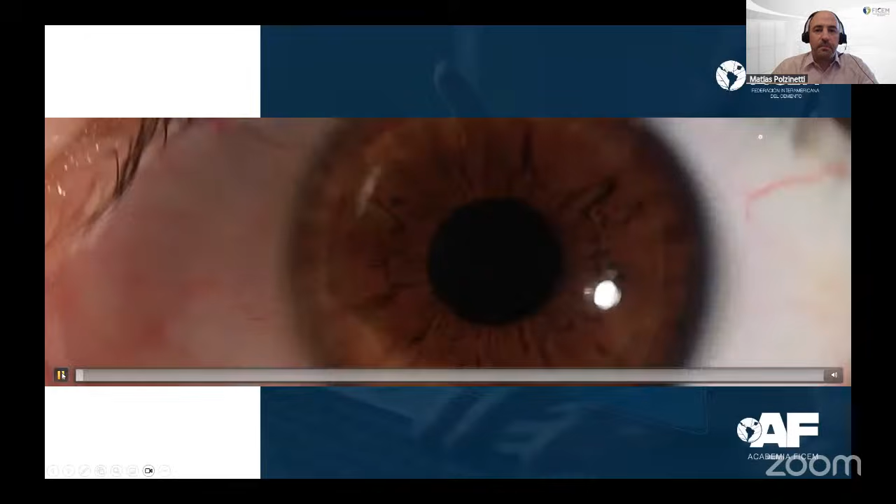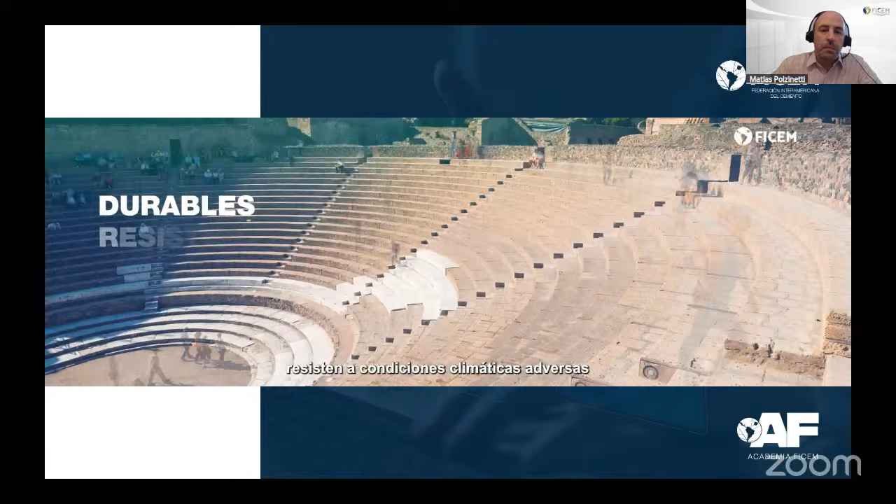Estamos presentes desde hace miles de años. Resolvimos las necesidades de la humanidad y cumplimos sus sueños. El cemento y el concreto son el cimiento que sustenta el progreso y permite construir nuestros anhelos. Soportan el paso del tiempo, resisten condiciones climáticas adversas y nos brindan seguridad. Un material tan único como insustituible, tan disponible como asequible, tan responsable y promotor del desarrollo económico como social.

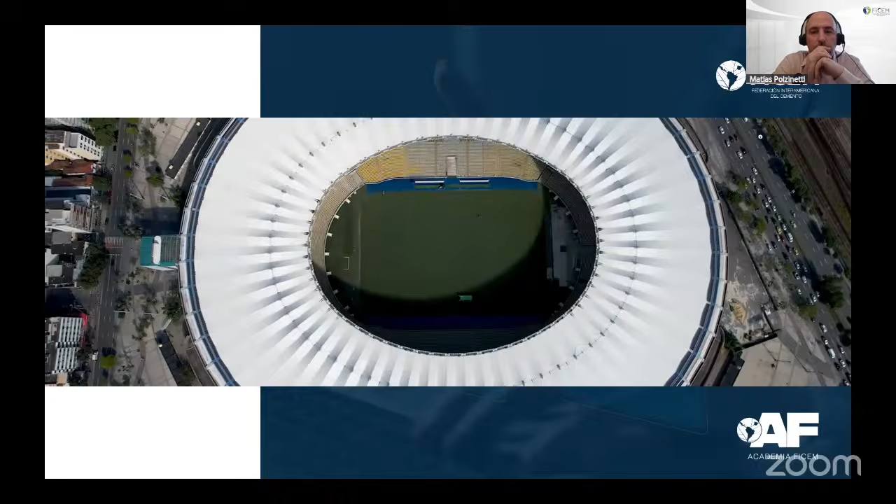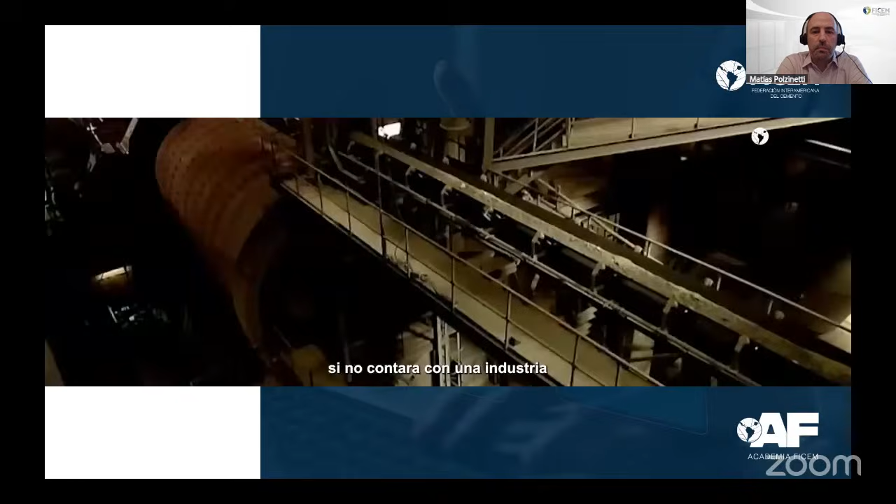Con cemento y concreto podemos construir viviendas dignas, pero, por sobre todo, hogares; puentes y carreteras, conexiones que verdaderamente importan; centros de salud y educación, pero antes que nada, calidad de vida; nuevos horizontes y futuros prósperos, con equidad. Nada de esto sería posible si no contara con una industria visionaria, responsable y comprometida con la sostenibilidad, con la firme decisión de lograr la carbono neutralidad 2050.

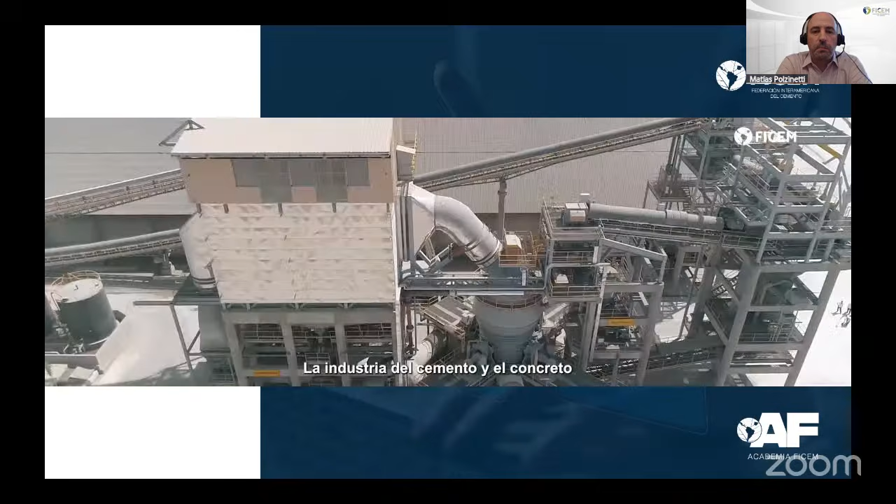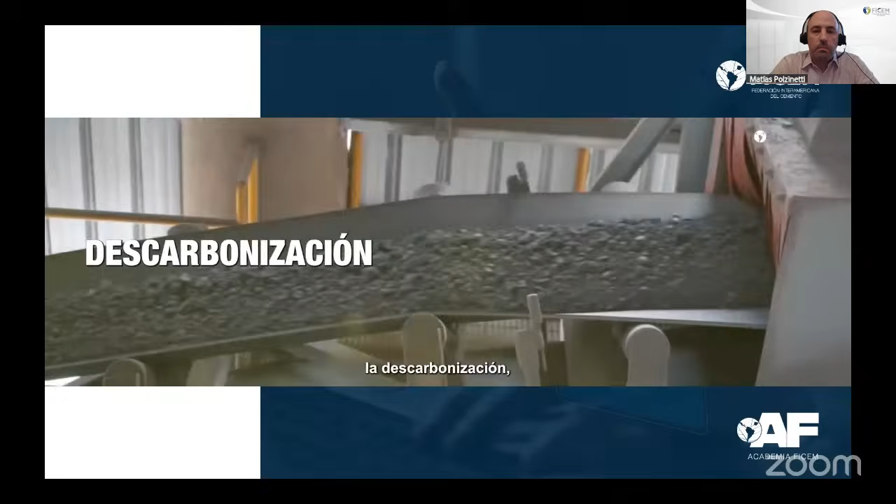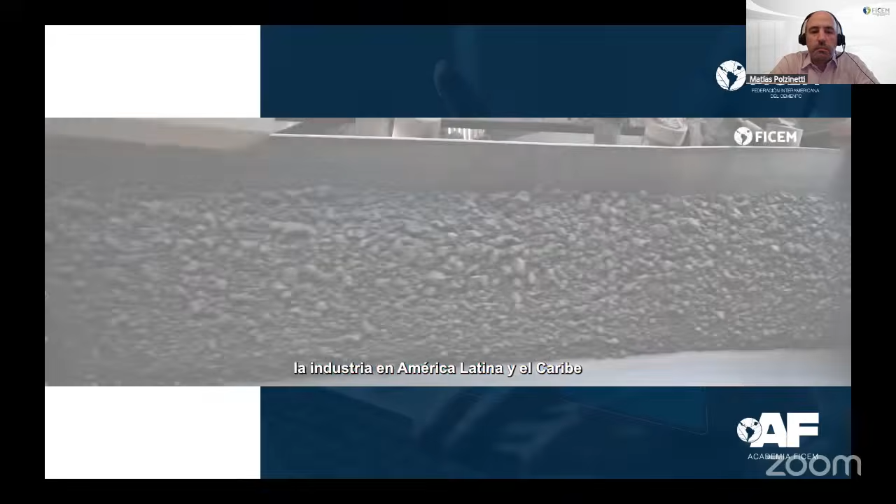La industria del cemento y el concreto es sinónimo de innovación, progreso y tecnología, con una búsqueda permanente de la mejora continua de procesos y productos, enfocados en la circularidad, la descarbonización, la biodiversidad, el bienestar de los trabajadores y las comunidades, y la satisfacción del cliente. Con estos objetivos y bajo el liderazgo de la Federación Interamericana del Cemento, FICEM, la industria en América Latina y el Caribe es consciente de su rumbo: traducir con cada acción la agenda global de sostenibilidad en una estrategia regional y nacional propia, y a la vez posicionar esa visión regional en el escenario mundial.

Somos 26 países, 77 empresas productoras de cemento, 13 asociaciones, cámaras e institutos, más de 20 aliados, y producimos anualmente 200 millones de toneladas de cemento en 270 plantas y moliendas. Por eso somos capaces de construir un futuro sostenible y resiliente para todos. FICEM, potenciando la fuerza de nuestros asociados y representando la industria a nivel global, fortaleciendo el relacionamiento de la industria y difundiendo sus logros. Somos la voz de un sector comprometido con la sostenibilidad. FICEM, la voz de la industria regional. FICEM, una sola voz. Todos somos FICEM.

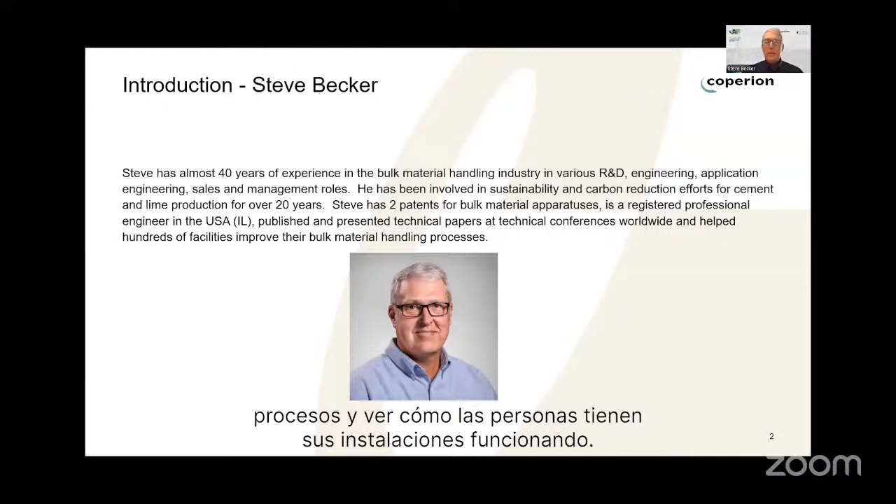I am going to speak to you today about cement blending. I've got almost 40 years of experience in bulk material handling in various R&D, engineering, sales, and management roles, and have done a number of papers and presentations throughout the world on various topics. But probably the best part of my job is visiting plants and facilities around the world and helping to improve their processes and seeing the way people have their facilities operating.

So just a few words about Coperion. Coperion is the world leader in feeding, conveying, size reduction, filtration, and thermal processing. You may have known us previously as Schenck Process FPM in North America. Coperion now incorporates several brands, including Coperion rotary valves and pneumatic conveying equipment, Raymond Mills, which you might be familiar with, Bartlett Snow thermal processing equipment, Stock equipment in the power industry, and of course, some of the former Schenck Process equipment that you might be familiar with.

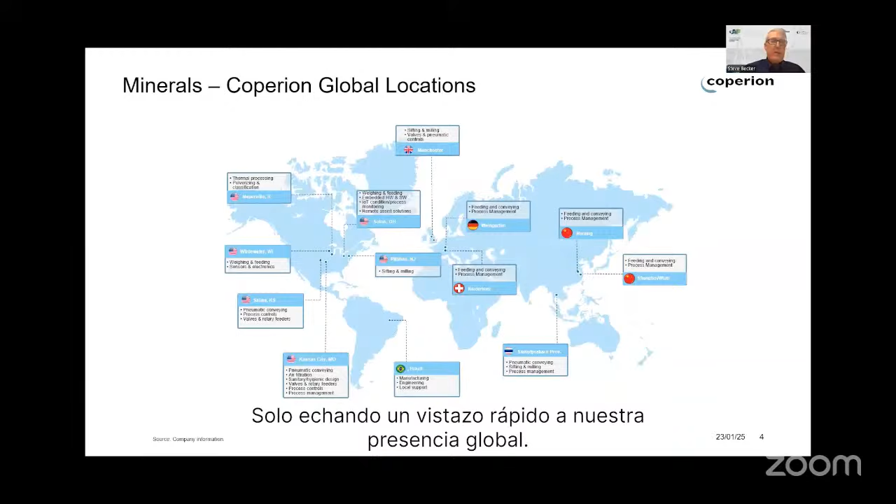Just taking a quick look at our global footprint, you can see we're located all over the globe with facilities to support your needs, both on the pre-sale side, during the sales process, and then after at commissioning and installation and support services as well.

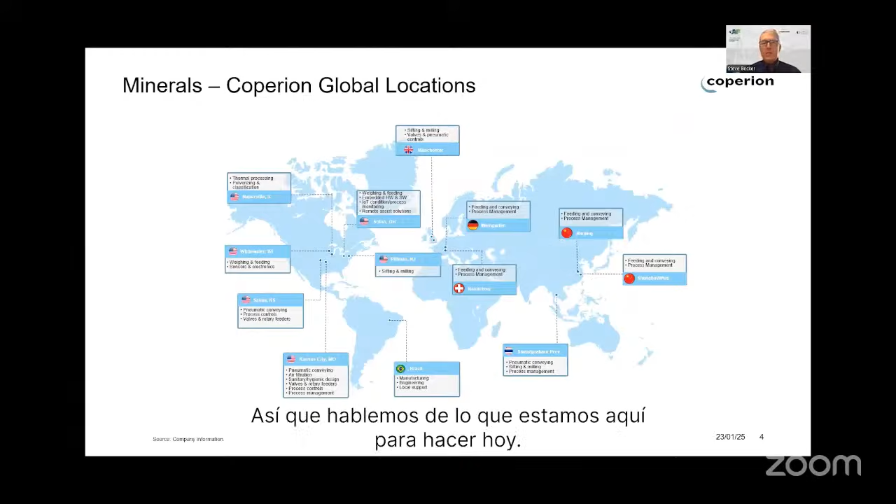So let's talk about what we're here to do today, and that is accurate cement blending. Our goal today is to discuss the importance of accurate blending systems and how to drive efficiency, quality, and sustainability in cement manufacturing, aligning with the evolving industry standards. The backbone of the modern cement blending operation consists of advanced technologies like Coriolis-based measurement, which we'll go into quite a bit of detail, just-in-time blending, and precise feeding and metering. This allows for a very flexible manufacturing process to adjust to the ever-changing SCM availability and concrete blend regulations.

This system works very well with all types of SCMs like fly ash, blast furnace slag, CKD, calcined clay, limestone, pozzolana, and many others. On the picture here, you'll see a typical configuration of what we'll talk about here today, including the silos for the constituents at the top and then the loadout of the blended cement at the bottom. As I mentioned, we're going to talk today about Coriolis-based flow meters and measurements, just-in-time blending and how we blend on demand, and also the importance of precision feeding and metering, and then talk about some of the additional process equipment that's required to pull this whole system together.

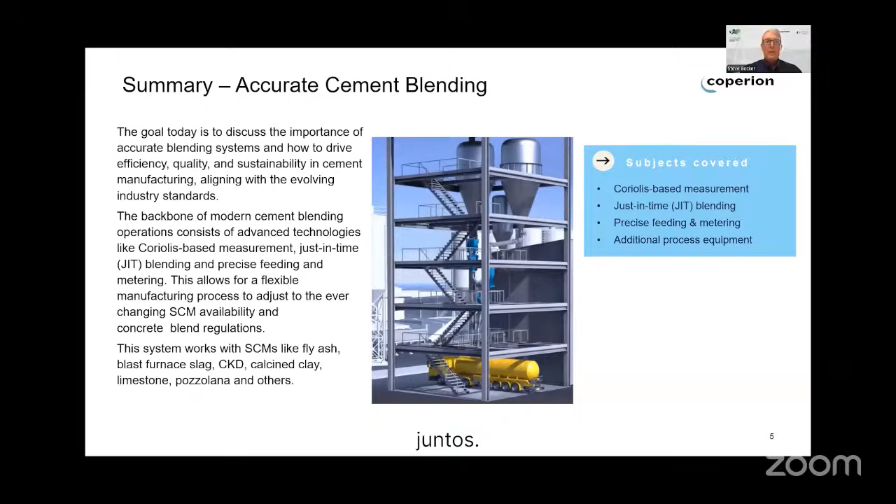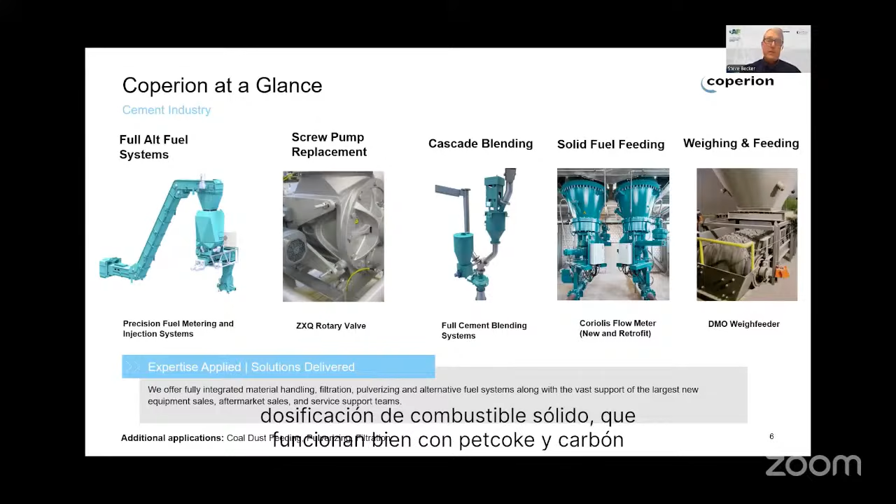As I mentioned before, you may know Coperion from some of the other products that we provide to the cement and lime industry. We've got our alt fuel systems, which can feed biomass and refuse to both the main burner and calciners. We have screw pump replacement valves that can replace screw pumps with a more energy efficient rotary valve. We've got the cascade blending systems, which is what we'll talk about here today, where we're going to blend different constituents into a blended cement. Also using the Coriolis technology as our solid fuel metering systems, which works well with petcoke and pulverized coal. And then also one of our many weighing and feeding pieces of equipment, including our weigh feeders, flow meters, and other feeders that we have to offer.

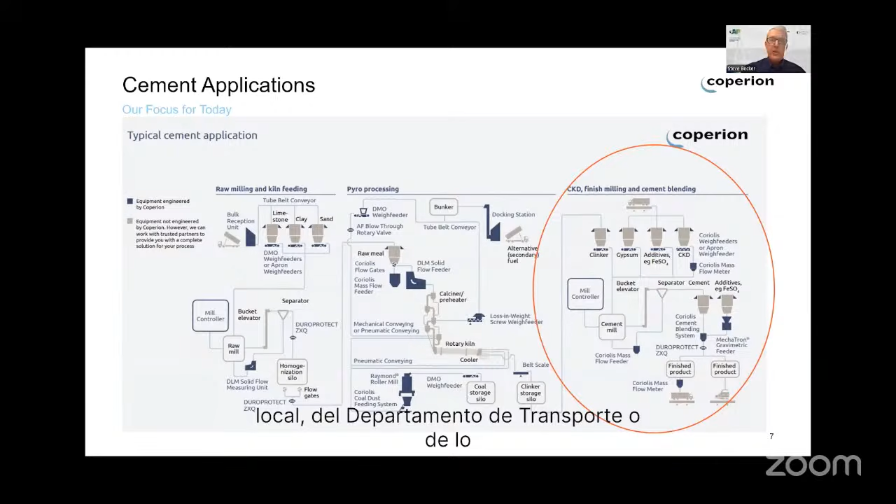So today we're going to talk about blended cement. If you look at this process flow sheet of the cement process, you can see we're going to be talking about everything back here at the tail end of the process. This is where the finished cement is blended with various SCMs right before it's sent to the customer, depending on the requirements of their local regulations, departments of transportation, or whatever the architect or contractor has requested.

So before we get too far into that, I'd like to go through some definitions. Let's talk about feeder and meter. A lot of times those two terms are used interchangeably, but there are some differences I'd like to talk about, and it's important to understand how the system operates to know this.

First, let's talk about a feeder. A feeder is really any device - it could have a screw, a belt, or even a vibratory tray - that accepts a set point that you would provide as the plant operator for a specific feed rate. That device can control and maintain that feed rate by adjusting the speed of the internal feed mechanism based on feedback from the load cells internal to the machine, measuring that change in mass over time.

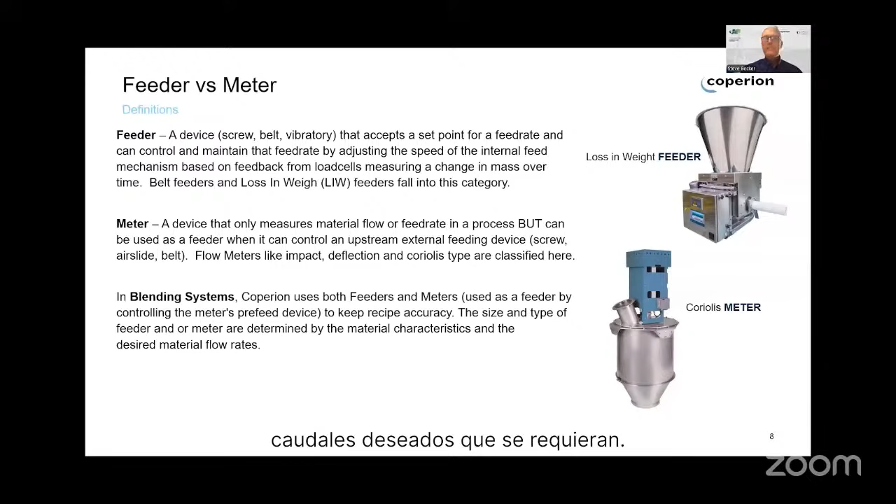This is a very key point we've found in accurate blending: you have to have a very accurate dosing system to dose those constituents. No amount of blending can make up for inaccurately proportioned ingredients. If you were making a cake and by mistake added too much salt to the mix, it doesn't matter how much you stir it, blend it, or mix it, you are not going to alleviate the problem of having a salty cake when you're done. So the importance of adding those components in the proper ratio initially is really the only way to get a good blended system. We start designing our systems with very accurate metering and dosing equipment to ensure we have the best short-term and long-term accuracies.

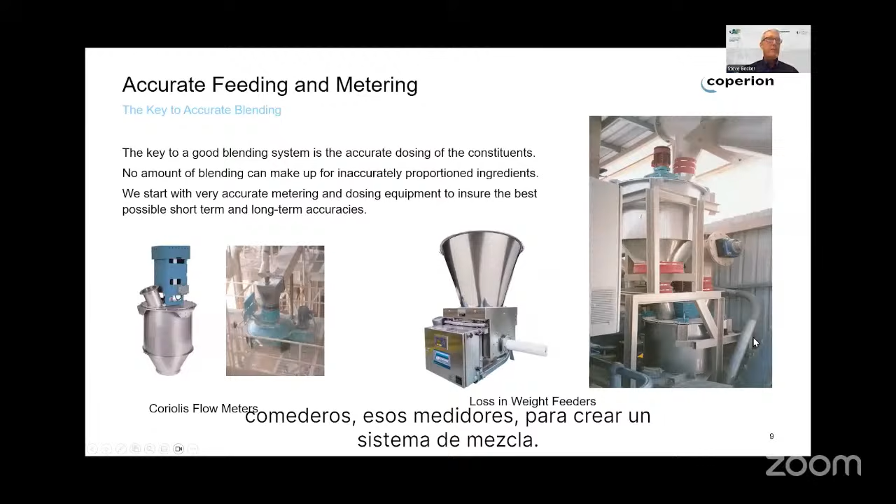I've got some examples here of a couple different flow meter designs. This is a lower rate size flow meter, this is a higher rate size flow meter. You can see the pre-feed device coming in here. And then we will also use some of these loss-in-weight feeders that we talked about earlier. This picture here illustrates how we put those feeders and meters together to create a blending system, and we'll go into that in more detail coming up.

But first, I'd like to talk about what our options are and what choices we have available for feeders and meters. For these low rate additives, approximately 3 tons per hour or less, we can usually use either a loss-in-weight feeder or a small belt feeder.

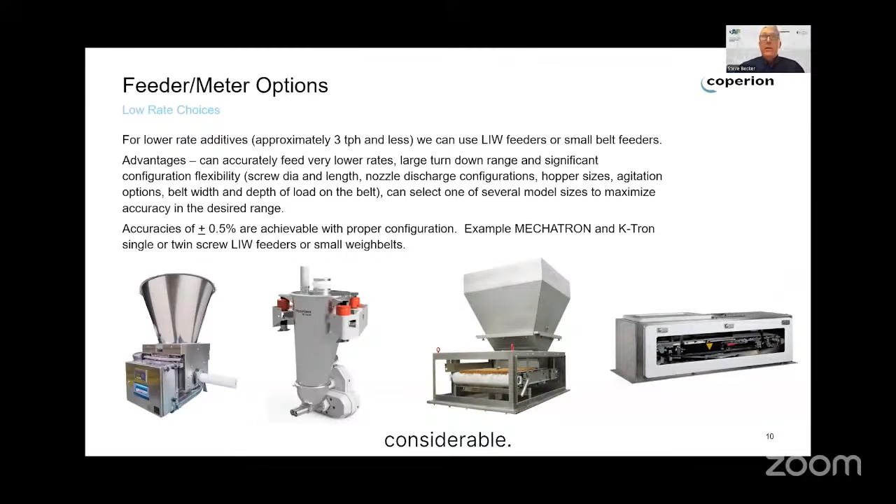The advantages of this equipment are they can feed at very low rates, they have a very large turndown range, and significant configuration flexibility. We can change out screw diameters, lengths, nozzle discharge configurations, hopper sizes, and a wide variety of components. On the belts, we can also change the depth of material on the belt, the width, and the belt speed, and those all can manage the feed rate range. Because we've got that large flexibility, they're very good for feeding low rate materials.

We can also select one of several model sizes that we have available, coming in a couple of different sizes to maximize the min rate and max rate to optimize the range you're looking to feed. The accuracies with these feeders are very good - as I mentioned, usually plus or minus 0.5% accuracy as long as they're properly configured. Some examples are the Mechatron or K-Tron single and twin screw loss-in-weight feeders, or small belts like we've shown here.

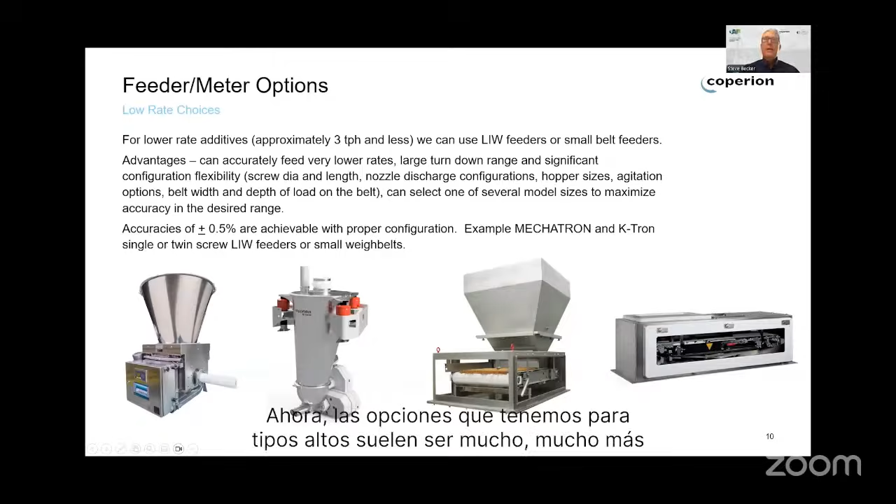Now the options we have for high rates are typically much, much higher, and these are typically for the high rate additives and OPC, which we're blending together. We typically would use a flow meter configured with a pre-feed device to make these a feeder. The advantages here are high accuracy at rates over 2 tons an hour, and even up to volumes as high as 1,200 cubic meters per hour. So very high volumes here.

Again, we have several models to pick from to maximize the accuracy and desired range - a couple different variations so you're not using the equipment on one end of the range or the other. When configured properly, we can minimize wear from abrasive materials, which most of what we're dealing with are typically fairly abrasive. We can adapt them to several pre-feed type devices - air slides, screws, or belt conveyors. We'll talk about those coming up in a later slide.

But if you want a higher accuracy, say plus or minus 0.5%, then we tend to go to the Coriolis flow meter. In most blending applications accuracy, as we said, is very important, so we tend to gravitate to the Coriolis flow meter for most of the weighing in these blending type systems.

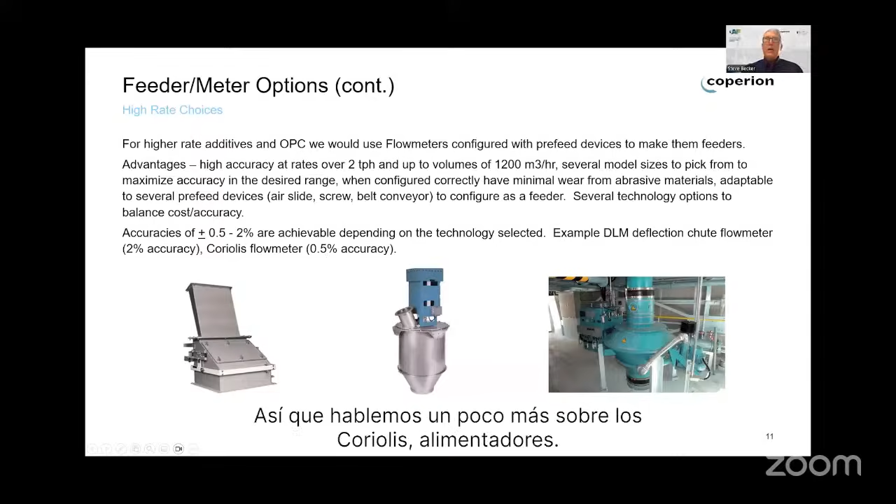So let's talk a little bit more about the Coriolis feeder. As I mentioned, we typically will use them at least for the final weighing mechanism, if not for all the weighing mechanisms for the higher rate materials, measuring the mass flow in the blended cement in real time as it passes through.

This flow meter is really unaffected by factors like material velocity, density variations, or wind, so you're not subjected to a lot of variations in weighing. It's a very reliable piece of equipment, and this technology also enhances accuracy during blending, ensuring optimal proportions and maintaining good product quality with those good accuracies.

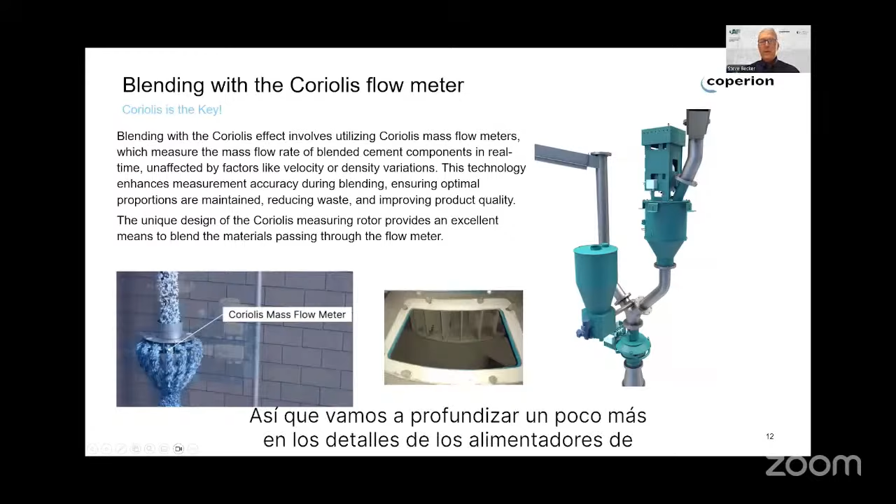So let's look a little bit deeper into the Coriolis feeder details. As I mentioned, the unique design of this meter provides not only very accurate metering, which we'll talk about, but also the added benefit of inline blending.

This technology of Coriolis flow meters has been around for quite a while. It was utilized for many years in the liquids measuring industry, and through the years it's been adapted for use in bulk solid material industries as well. This technology has been in use for bulk solid material handling for over 30 years now, so it's a very well-proven technology.

Material comes in the top of that rotor. There's a small deflection cone in the middle around that shaft. As that rotor rotates at a fixed speed, the material hits that cone, works its way out across the rotor fins, and then out to the outside, discharging at the bottom of the feeder. So if you've got separate streams of material entering the top of this rotor operating at a fairly high speed, you're going to see very good blending and mixing as it runs through the rotor and is mixed back together inside the housing of the multi-core as it exits. That's where the magic happens with the Coriolis meter.

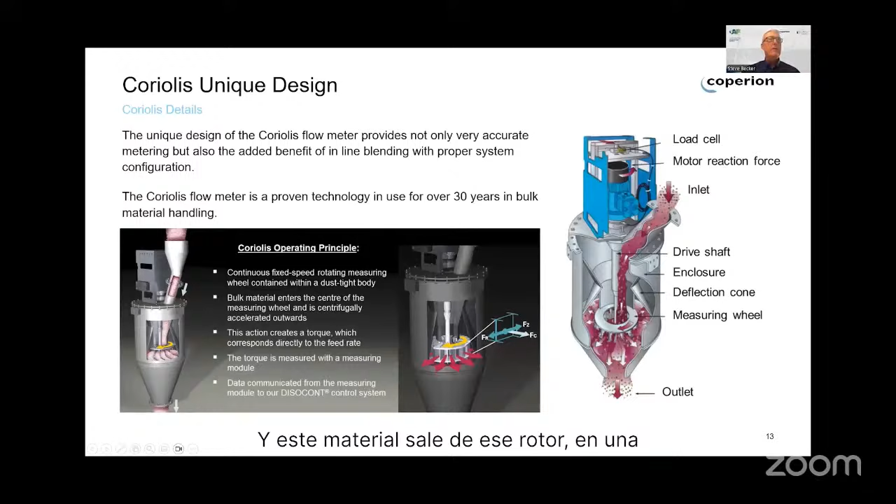Here's another example—you'll see the material coming in the top. It feeds down through this diverter chute into the rotor, and you can see as the rotor is rotating, this material is coming out in a very consistent, well-blended condition. This shows you a little free body diagram of what's happening on the rotor.

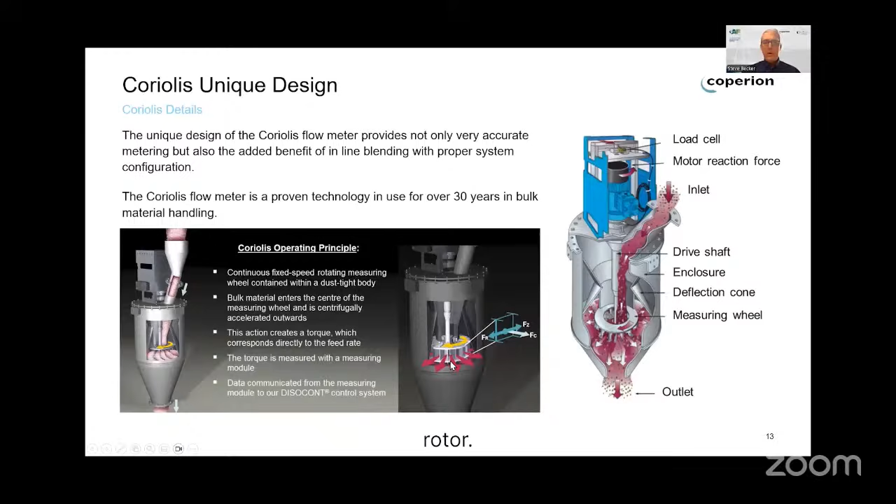Let's take a look at the next slide where we'll go into the math. I won't go too deep, understanding this is a lot to go through, but I'll give you a quick review of the math involved here so you know I'm not just lying to you.

So what we end up with is motor torque divided by a constant, which says the mass flow is directly proportional to the motor torque. That's why these are such accurate machines—there are no other variables that can affect that. And when we measure that motor torque, we can measure it very accurately based on the configuration of the system we have.

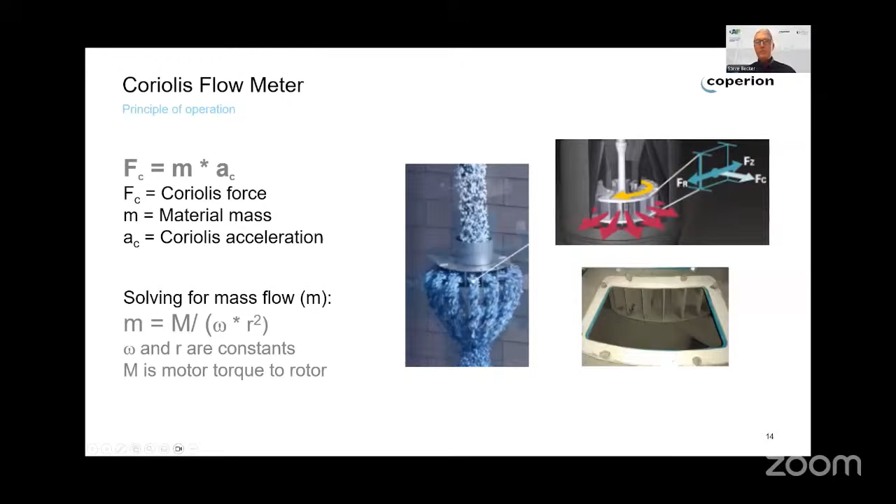Moving on to taking that Coriolis flow meter, now that we understand how that works, we're going to turn it into a feeder. How do we do that? As we mentioned before, we're going to add some type of pre-feed device.

Our control compares that to the set point we've given it, to say I want to feed X tons per hour. It will then adjust our pre-feed device, in this case a valve on an air slide—opening or closing it depending on what adjustment we need. The material flows out from that control device across the air slide down to the flow meter.

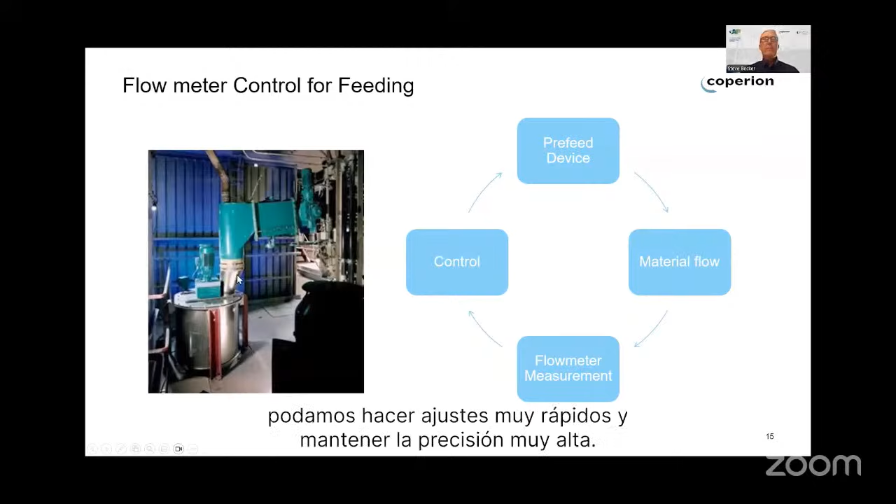And then we measure that again, and we continue this loop over and over until we can maintain very accurate feed rate accuracy. In the time it took me to explain that, the control system probably would have done it 100 or 150 times, or more. This is continually running, a very fast control loop, so we can make fast adjustments and keep the accuracy very high.

Now, looking at some of the flow meter pre-feed devices we'd typically use, let me start with an air slide. This is probably our preferred device for a number of reasons. They're very common in cement plants and lime plants already, used because of their minimal wear, since the material is so fluidizable. It's a very easy way to move material, with very accurate flow control adjustments.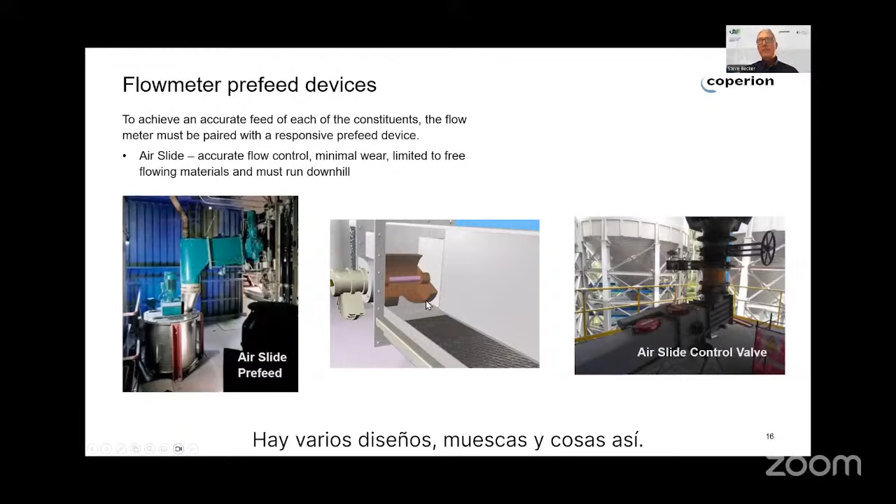So what we've got here is a cutaway showing the actual representation of what that control valve looks like. There are various designs and notches and things. We don't make air slides, we use air slides, but the air slide manufacturers can really help you dial in the best control valve design for the material and situation you have.

And here you can see another example. We've got the bin here, with some manual valves to do maintenance on the control valves. And the air slide—here's our control valve in this situation—and our air slide going down, feeding our flow meter.

So this is an arrangement, as I said, we prefer. There is, for a number of reasons, minimal wear is obviously one. It is limited to free-flowing materials. Most of the materials that we're talking about, most of the SCMs and the OPC we deal with are free-flowing, so that's usually not too much of an issue.

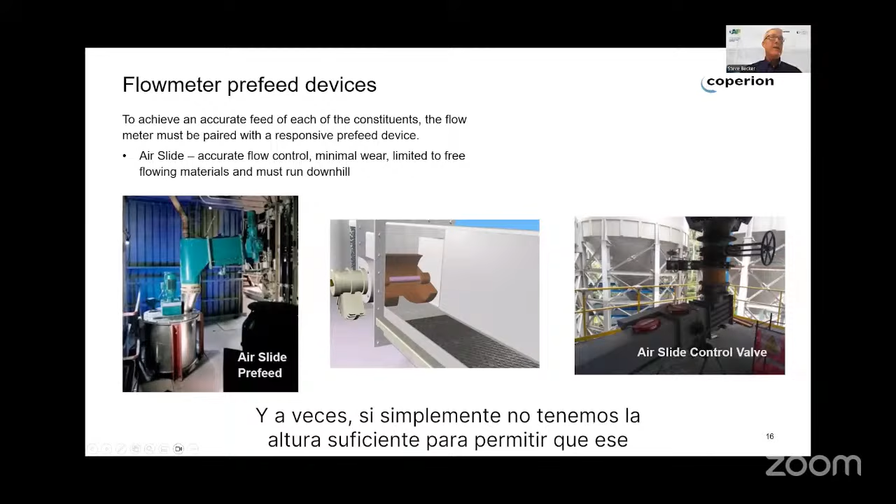But they must run downhill. They rely on gravity to get the material to move. So if you've got a fairly long run from the bin or hopper to where the flow meter is located, it could be a little problematic because you do need some height to make that adjustment. And sometimes we just don't have the height to allow that material to flow downhill.

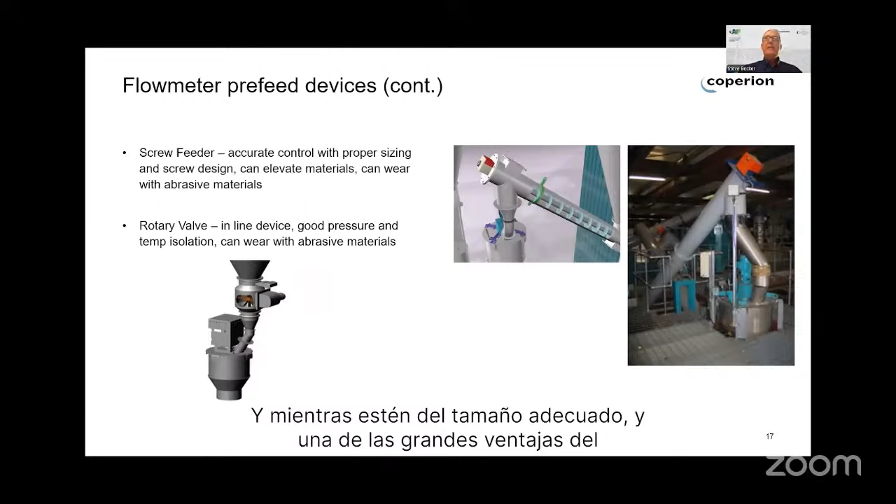Some of the other pre-feed devices which we will use include screw feeders. Screw feeders are another very good way to accurately control, as long as they're properly sized. And one of the big advantages with the screw feeder is you can actually elevate materials. Whereas with the air slide, we have to make sure that we're downhill from where the material enters the air slide, with a screw conveyor, we can configure it to actually raise material up.

And you'll see in this picture over here on the right, we're doing that. We've got the flow meter here sitting through the floor. We had some process piece over here, which we had to get the material over to the flow meter. So we've put in this feed screw that brings the material up and gets it to the flow meter.

Now there is some requirements for screw feeders that we do want to maintain. There's a minimum RPM that works best because we don't want pulsations going to the flow meter, because that control loop's going to see material and then no material and material and no material, makes it hard for it to control. So by increasing the speed of this screw, we can make sure that we don't have those pulsations and the accuracy is maintained.

And then one of the other devices that we will use is a rotary valve. You're probably very familiar with rotary valves as well. A very good device we use in line with the flow meter. Has excellent pressure and temperature isolation. So if you've got a high pressure or high temperature situation above the flow meter, we would definitely want to isolate the flow meter from that.

So rotary valves are very good. But much like a screw conveyor, we can have abrasion and wear situations because a lot of the materials we have are very abrasive. So we can have wear on rotors, bearings, seals, all the things like that.

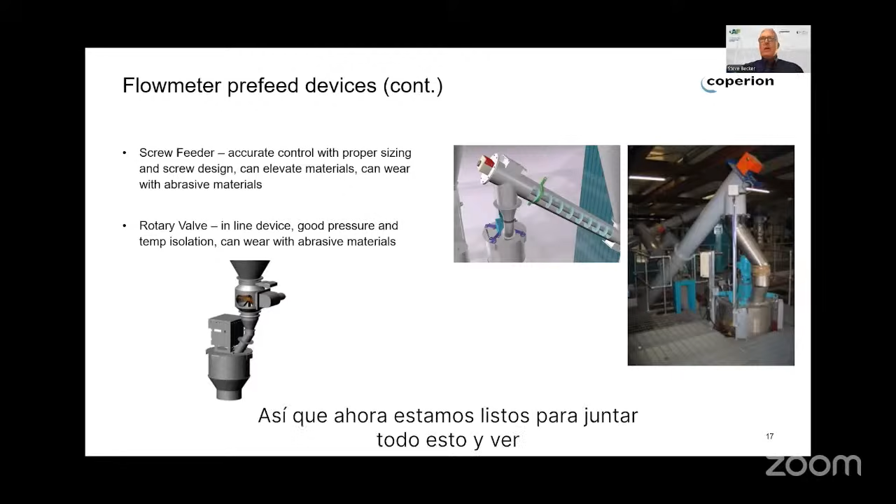So now we're kind of ready to put all these together and take a look at how do we configure all these pieces of equipment to give us a blending system. So let me start by going through that.

We've got very accurate feeders now. We've got flow meters with pre-feed devices. We've got a very fast-acting control loop, but we somehow need to get blended cement out of this. So here's how we configure it to do that.

So let's start up here with this picture with these two bins or silos. We'll call it material A and material B. And we'll work our way through this process and this configuration.

So material A, we're going to extract out of this bin. Through here, we show an air slide and a control valve. We're going to extract that down out of that bin. It's going to go run downhill, and we're going to feed this flow meter here. We'll call that material A's flow meter.

So material A's flow meter is going to get a set point from the recipe that we have established. And we're going to control this control valve to hit that set point. So we're running that control valve or that control loop right here in this situation, maintaining a very accurate set point feed rate that we have run to this device here.

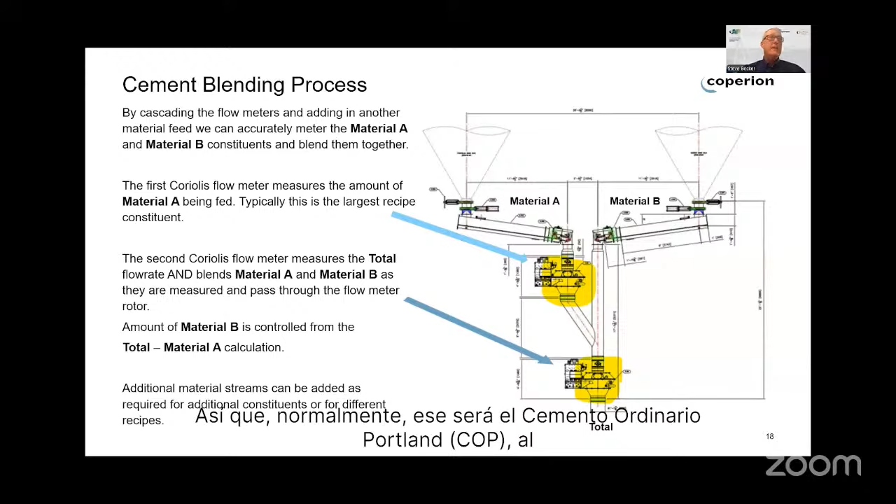Typically, we'll do this for the largest recipe of whatever that recipe calls for, the largest constituent. So typically that'll be the OPC that we're going to blend the other additives to. So once we have that material A running through its flow meter and we're feeding at the proper rate, it's going to flow down and flow into this second flow meter, which we're going to call the final flow meter.

So that final Coriolis flow meter is measuring not only the material that's coming down that we're measuring from material A, but we're also going to extract material out of this bin over here, bin B, through another air slide and control valve, and that's going to drop directly right into this flow meter. So no other flow meter or weighing device on this leg. We're just going to drop it down directly into that final flow meter.

Since we know the total that we're producing here, and we know how much of material A we're putting into the final flow meter, we can calculate that the total minus A gives us how much material B is. The control will actually look at that ratio to make sure that we are having the correct amount of material B in this total blend. If we don't have that correct ratio, this control loop on this flow meter will start adjusting this control valve here, and we will increase or decrease the amount of material B flowing into this arrangement so that we get the correct ratio of material A to material B as it comes out here.

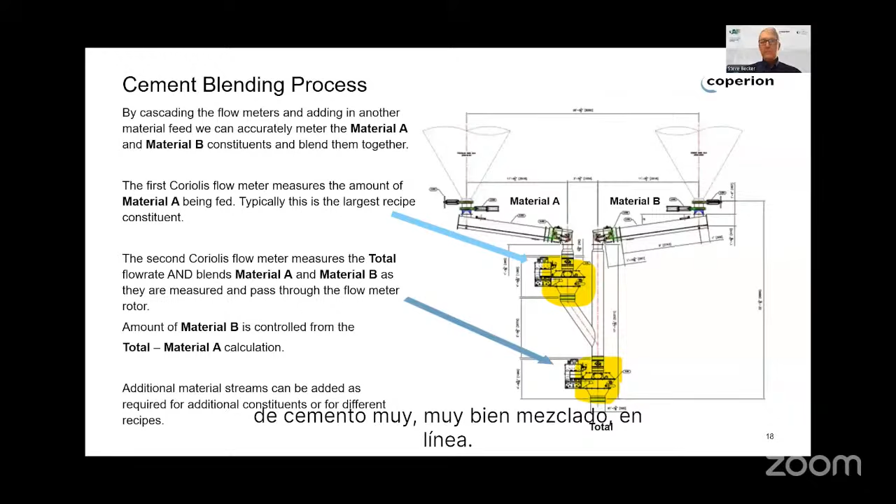So you won't have to run a 15% fly ash material. You won't have to run, say, 500 tons and put it into a silo. You can just run that as needed and run it right into a truck or a rail car as you need it. And then as the next truck or rail car comes in, we can switch that to a 10% fly ash blend almost immediately.

Some plants will blend the cement in the mill, so they'll run that back through the finish mill and add the SCM into the finish mill and run that through. That does work, and that's a good way to do it. However, you do take up some mill capacity by doing that. So if your finish mill is already running near capacity, you don't want to lose that capacity.

And so by putting this blending system downstream of the mill, you can run your mill at capacity and not have to worry about changing the grinding or the classifier or any of the equipment in the mill circuit as the fly ash goes in, or limestone or whatever. You can optimize that mill for grinding clinker, since it will only grind clinker.

We also eliminate the need for a secondary mixer, blender, or pug mill. This reduces a considerable amount of space, might even reduce an entire floor in a blending tower, and it reduces capital and operating costs. A lot of times these mixers and pug mills have very large electrical motors with a very large electrical draw, and by eliminating that piece of equipment, you've eliminated that electrical requirement and saved some operating costs as well.

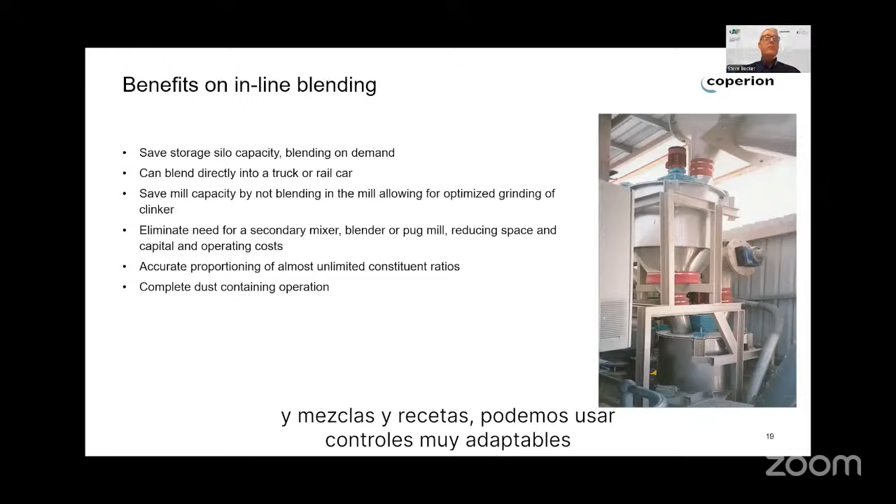We're accurately proportioning those additives in there, and as I mentioned, we have an almost unlimited number of ratios, blends, and recipes we can use. The control is very adaptable to take a number of different recipes and hold them in, accurately measuring and metering to those recipes when called for.

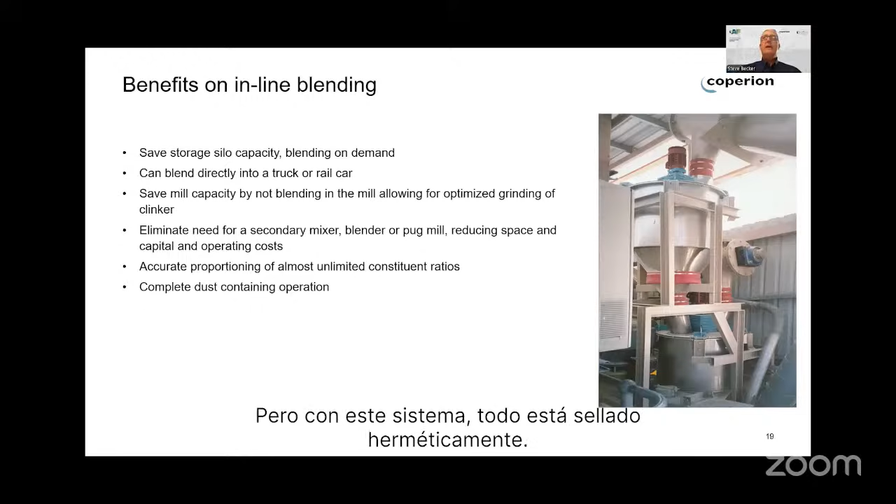As I mentioned previously, the entire system is completely dust contained. Sometimes these pug mills and blenders need to be accessed, so they don't always seal the best. But with this system, everything is sealed up tightly. We do have some flex connectors you see in this picture here, but those are very robust and don't typically see a lot of wear, so they last a very long time before you need to replace them.

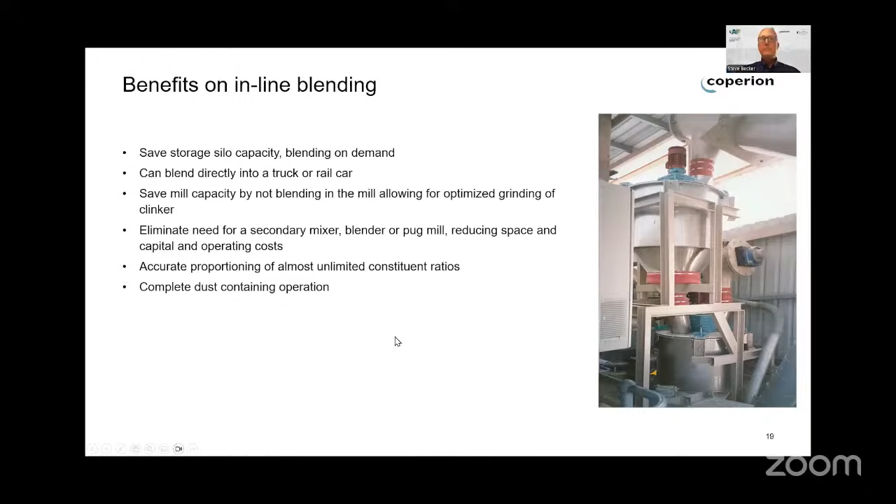So let's look at some of the other equipment that we would typically use in a blending system. Let's talk first a little bit about pneumatic conveying, or how you connect the dots. We've got these process pieces now, but we need to connect them up between different process steps. One of those is pneumatic conveying.

We would use this a lot when unloading a truck or a rail car with the SCMs. If the truck or rail car comes into the plant carrying your fly ash or ground blast furnace slag, you somehow need to unload that and get it up into the silo, which typically can be very high. So we typically use pneumatic conveying to do that, particularly if the truck comes in as a bulk truck.

So we can do both lean or dense phase conveying. I won't go into the details in this lecture, but that has to do with material to air ratios, and both have their own place depending on the material characteristics, the convey distances, the desired transport rates, and what's the most economical in capital and operating costs.

This picture here you'll see is a dense phase pump. This is very common for large feed rates of very abrasive material. They run at very low velocities, so the wear on the pipe and components is relatively low.

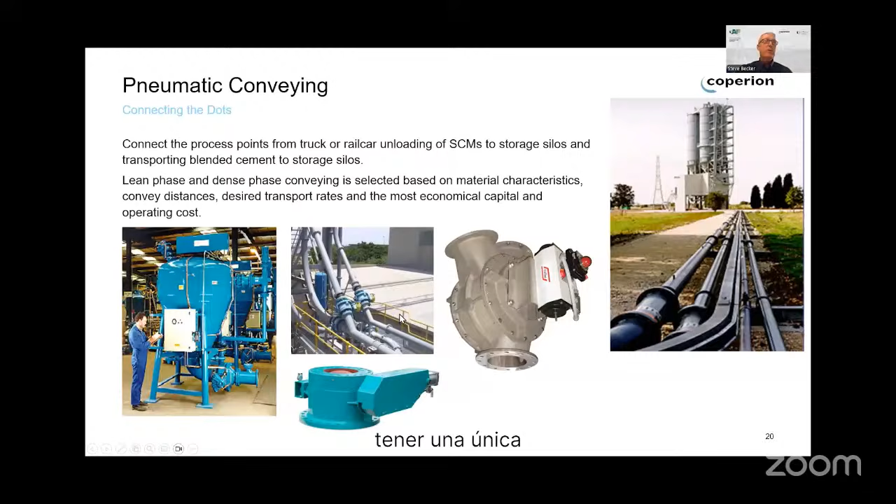This picture here shows a diverter valve, and you see a close-up of that diverter valve here. If you have a truck unload or a train unload station, we can have one single connection to that truck, and then have diverter valves along the pipeline to dump it into various silos. So if the truck you have now is fly ash and the next truck coming is blast furnace slag, you can divert that next truck into a different silo using pneumatic conveying diverter valves.

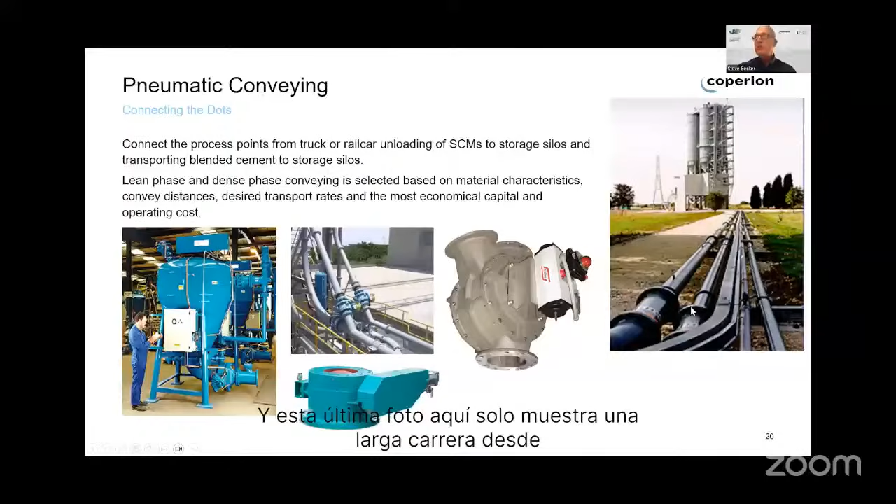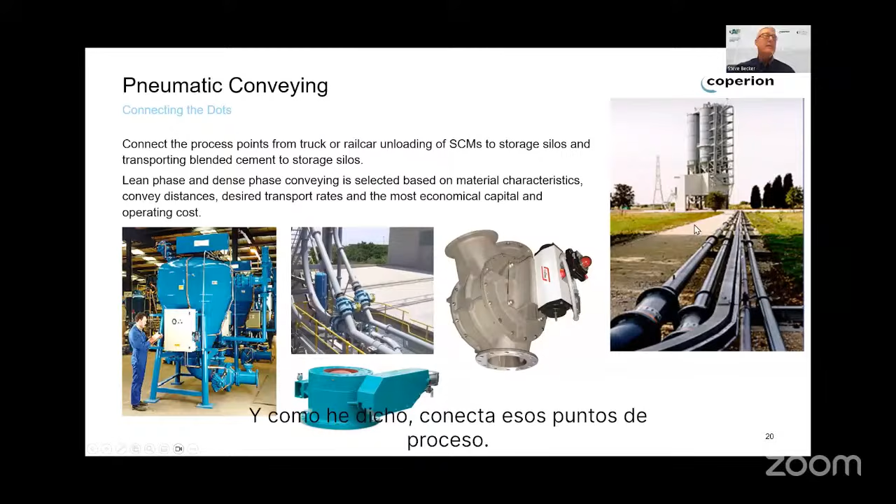This we call a sphere type valve, used for very abrasive materials, typically on the top and bottom of these pressure pots as well. So we have various uses for those. This last picture here just shows a long run from a process point out into a load out facility with a silo. Very flexible, very adaptable, and as I said, it connects those process points.

Next, I'd like to talk about filtration. Environmental regulations and employee health and safety are very important in plants today. Air filtration really helps with both of those and is an important part of any process we put into a plant. Air filtration is very common in silo venting, transport air venting, air slide venting, transfer points, and process filters.

All these need to be designed to specific requirements and make sure they meet your local regulations and plant permits. They should be selected with the correct media for the application, material, and airflows. We have several technologies available, from traditional pulse jets to very energy efficient medium pressure units, which use their own internal blower rather than compressed air. So again, some opportunities for energy savings there.

I would recommend you look at suppliers who have years of SCM filtering experience, because they are pretty difficult to handle and filter at times. You want to make sure you get the correct sizing and filter media selected the first time, rather than having to go back and resize things later.

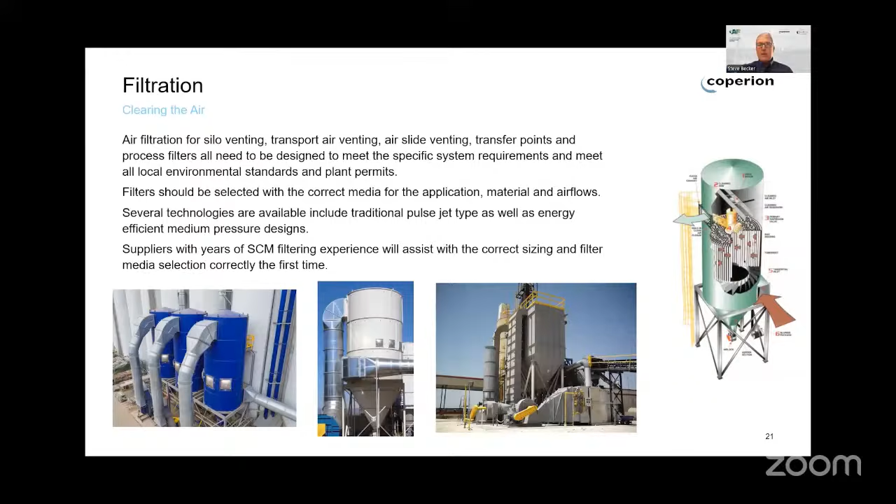So next, we've got this blending system concept that we just went through using the Coriolis flow meters. It still might be a little difficult to grasp, because there's a lot going on, a lot of parts moving around, and a lot of configurations we have together.

So I'd like to offer this animation that demonstrates how the equipment's used and some of the technology we discussed today. Let me play that now, and it'll tie together all of what we talked about here today. This video is on YouTube, so all you have to do is look up Coperion cement blending, and it's available right on YouTube if you want to take a look at it later. So I'll be quiet, and let's watch the video.

So next, what I'd like to talk about, since we've got all these formulas explained, and all these pictures and animations that are really cool, right? But does this really work? That's the real question. So what I've got here to offer for you is a real life example that we can discuss.

This particular application is at Argos Rio Claro in Colombia. They are blending a calcined clay with OPC. This blending plant has been in operation since 2018, and it mixes multiple ratios of clay up to about 30%, so some pretty high ratios.

They have reported consistently achieving coefficients of variation of less than 10. If you don't know what coefficient of variation is, that's a statistical measurement of distribution in a population. It tells you how much variation you've got from sample to sample. The blending and mixing people will tell you that any coefficient of variation less than 10 is typically a homogeneous situation. So the results Argos has been getting have been very, very good, very consistent, and very homogeneous in their operation thus far.

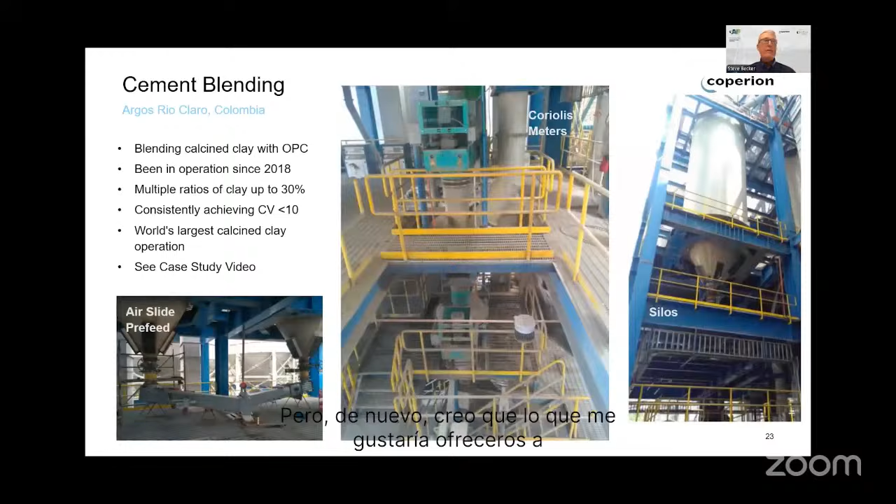But again, I think what I'd like to offer you next is a kind of case study that we did with the people at Argos, which we appreciate their help with. Let me play that next.

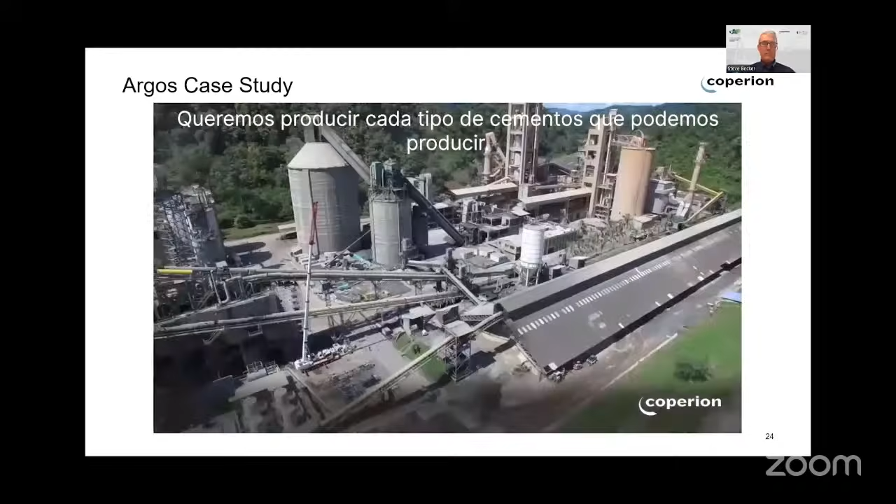I believe that blended cements are going to be the future of cements. This is a 1,500 ton per day kiln, the biggest and newest calcined clay kiln in the world. We want to produce every type of cement that we can produce, not just a very specific type 1 or type 2. We're going with whatever cement the market is requiring. That also required the system to be adaptable.

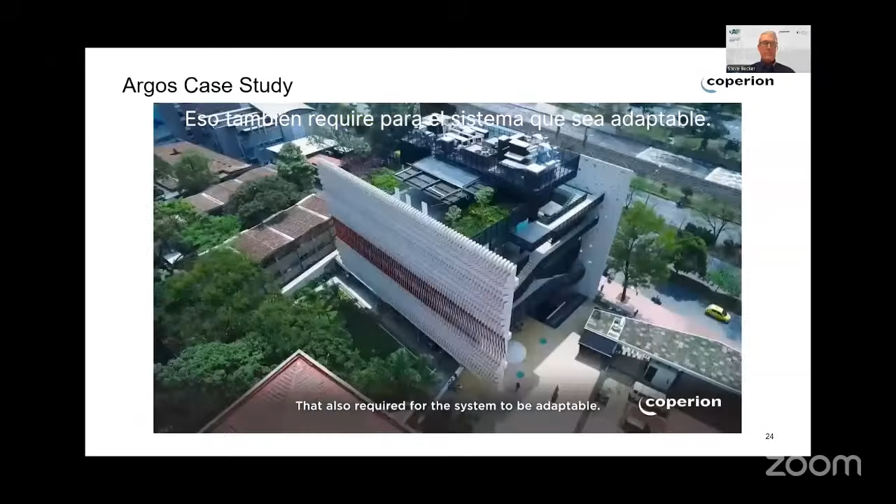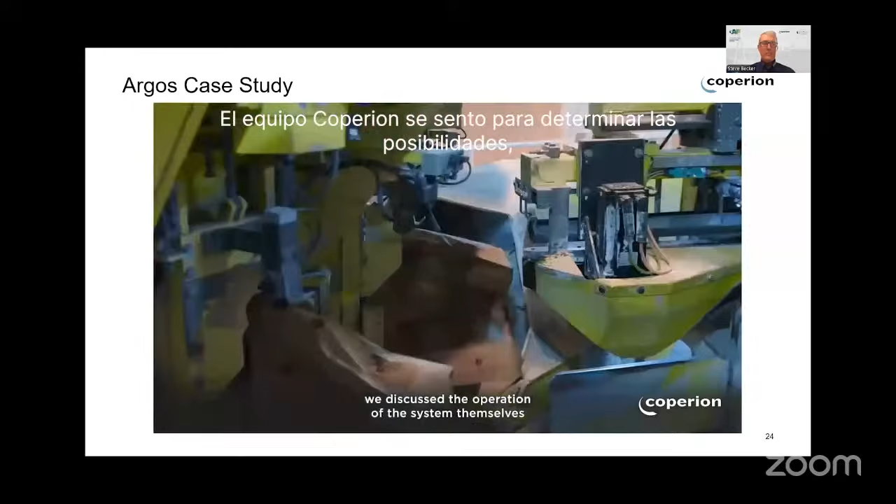Each and every cubic inch of that material needs to be the same in order to be usable by the end user when they're building something. The team from Coperion, we sat down, discussed the possibilities, discussed the operation of the system themselves, and figured out whether or not, with a good degree of certainty, that would actually mix and produce a homogeneous material at the end.

Having the team from Coperion, led by Ernesto, developing with us, conversing every day from a technical point, allowed us to get to a solution that, as you can see right now in operation, actually works. I was very proud to be part of that team.

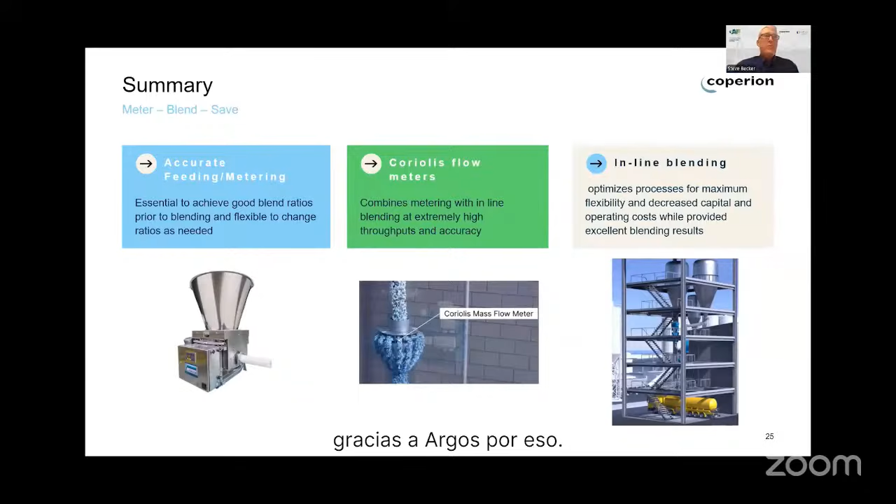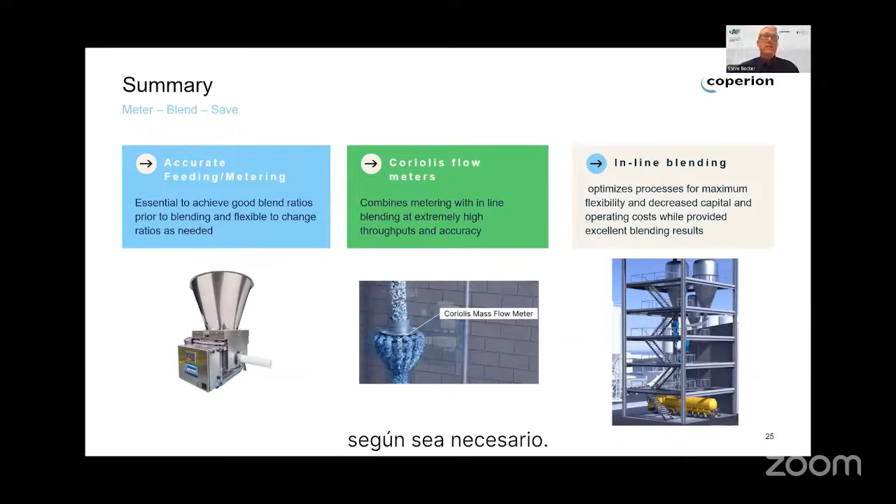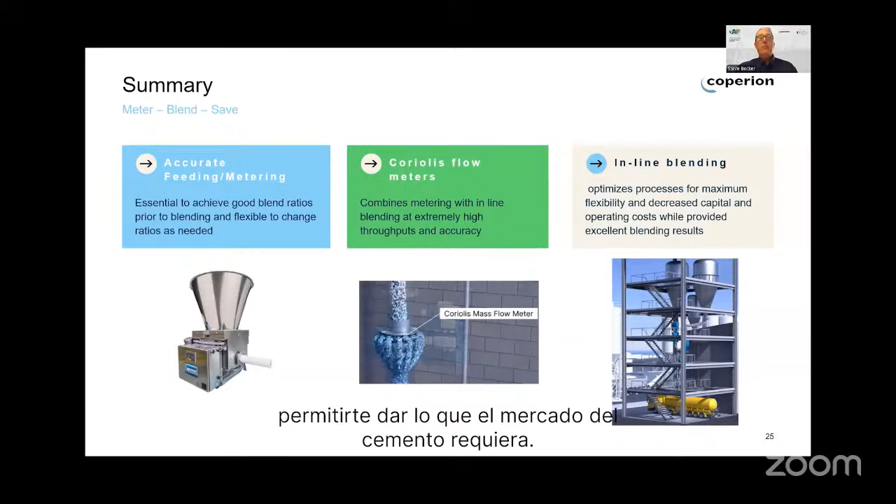The key takeaways: any good blending system requires accurate feeding and metering. These are essential to good blend ratios prior to blending, and need to be flexible to change with different recipes and ratios as needed. The Coriolis flow meter we discussed combines both metering and inline blending at extremely high throughputs and accuracies, adding the blending mechanism of the weighing device as material exits the flow meter. By putting all these things together in an inline blending system, we can optimize the process for maximum flexibility, allow you to meet whatever the cement market requires, and decrease capital and operating costs while still providing excellent blending results and reliability.